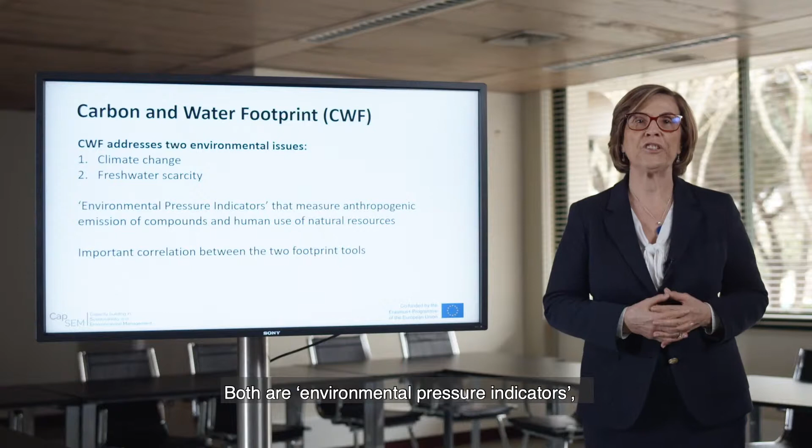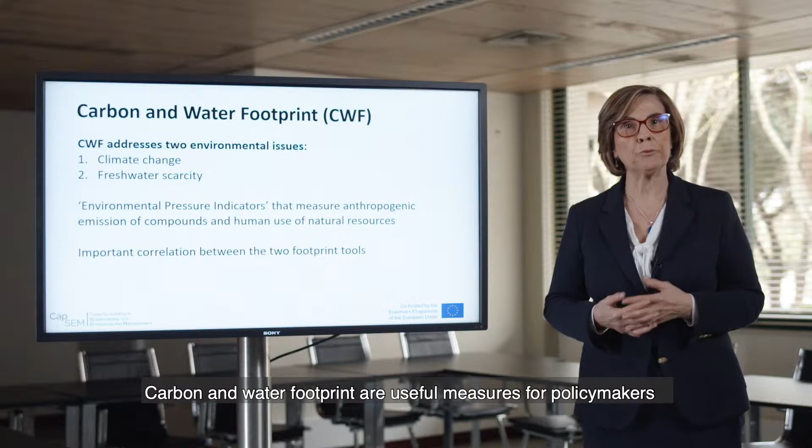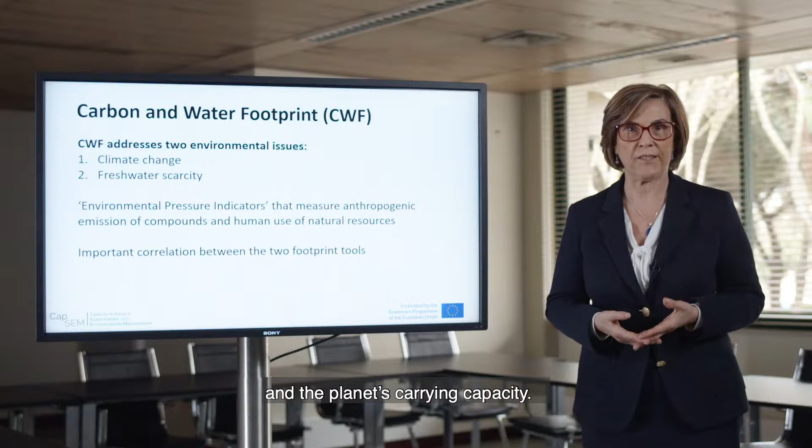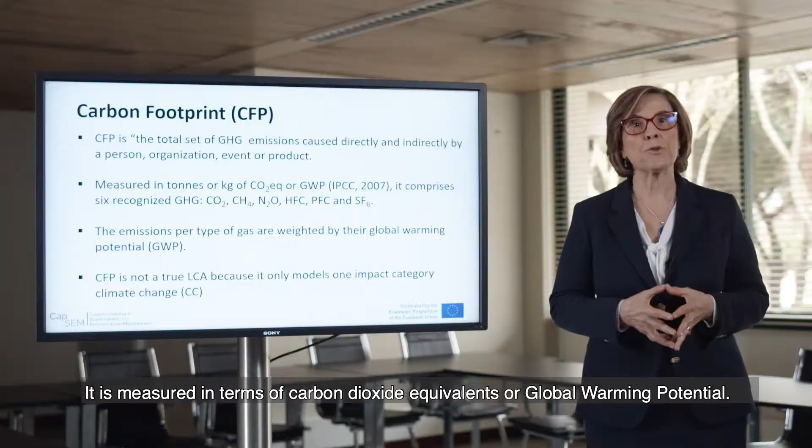Now we turn to the concept of carbon and water footprint. Both are environmental pressure indicators, measuring people's use of natural resources and the anthropogenic emission of compounds into the environment. Carbon and water footprint are useful measures for policymakers working to address overexploitation of natural resources and the planet's carrying capacity. Carbon footprint is the total set of greenhouse gas emissions caused directly and indirectly by a person, organization, event, or product. It is measured in terms of carbon dioxide equivalents, or global warming potential.

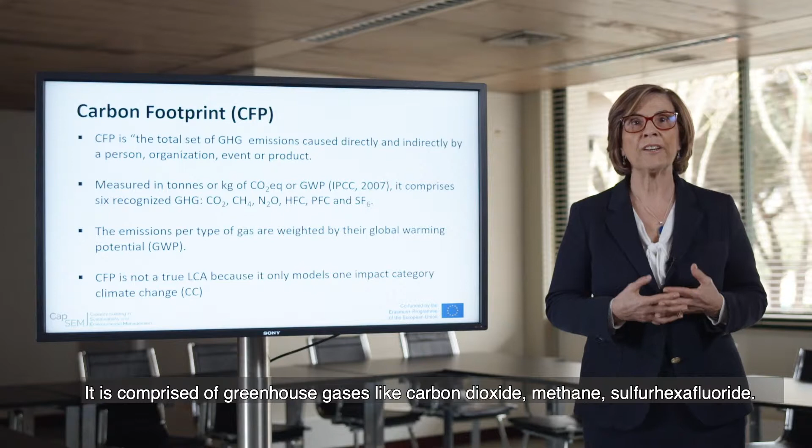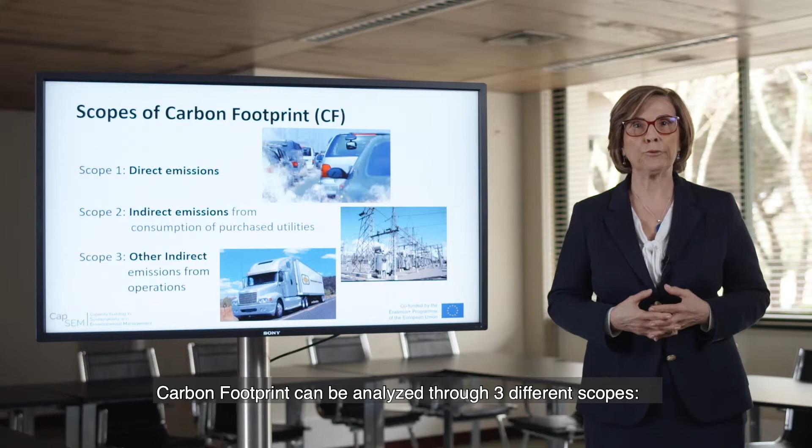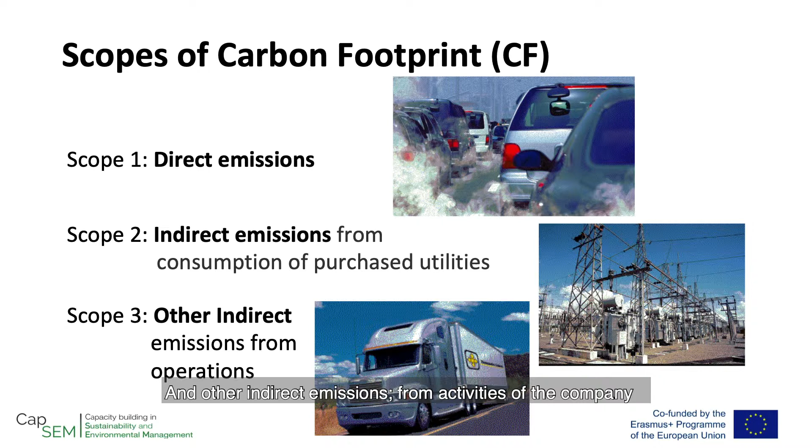It is comprised of greenhouse gases like carbon dioxide, methane, and sulfur hexafluoride. Carbon footprint is not a true LCA because it only models one impact category, climate change. Carbon footprint can be analyzed through three different scopes: direct emissions, which includes combustion sources; indirect emissions, which includes consumption of purchased utilities; and other indirect emissions from activities of the company, such as transportation of waste.

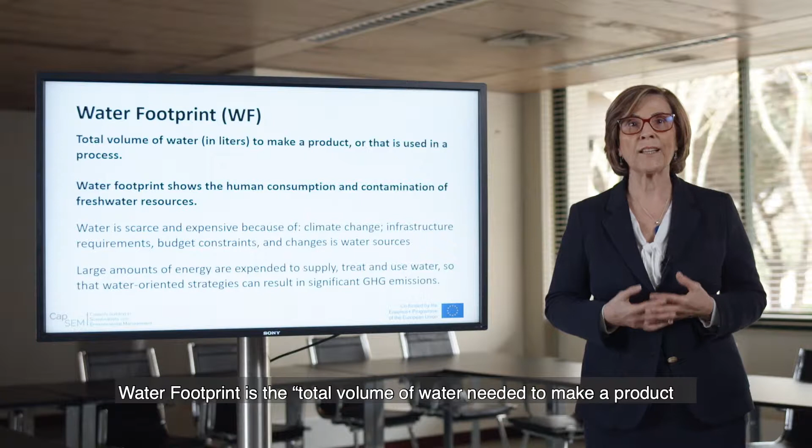Water footprint is the total volume of water needed to make a product or to be consumed in a process. Water is becoming more scarce and expensive. Climate change and other stresses are limiting the availability of clean water and affordable energy. Water footprint shows human consumption and contamination of freshwater resources.

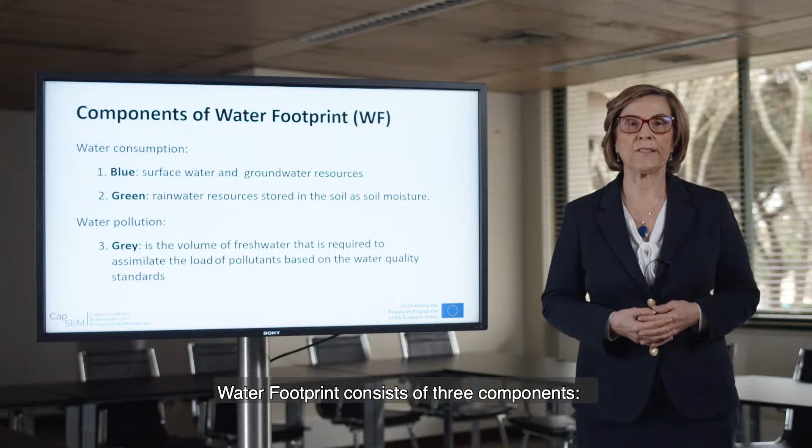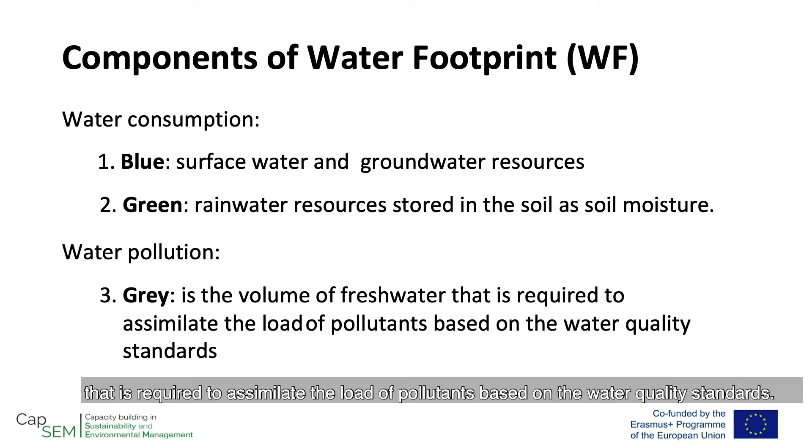Water footprint consists of three components. The first two are blue and green, which relate to the consumption of water resources. The third is grey, which is the volume of fresh water required to assimilate the load of pollutants based on water quality standards.

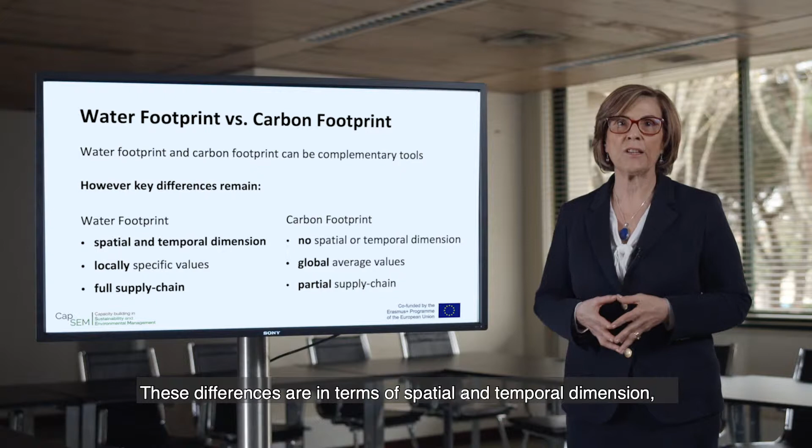Water and carbon footprint can be complementary tools. However, some key differences remain, in terms of spatial and temporal dimension, specific or average values, supply chain, and so on.

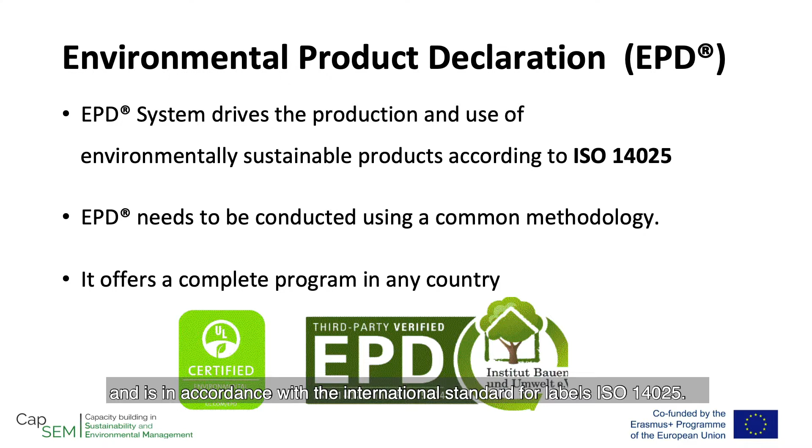Environmental Product Declaration (EPD) is an independently documented report containing environmental data of products or systems based on LCA. EPD is organized using a common methodology and is in accordance with the International Standard for Labels, ISO 14025. LCA is a method and EPD is a report.

For each product group, rules are developed called Product Category Rules, PCR. These control the calculations and data collection requirements between product categories. It enables the creation of an EPD. PCR is included in ISO.

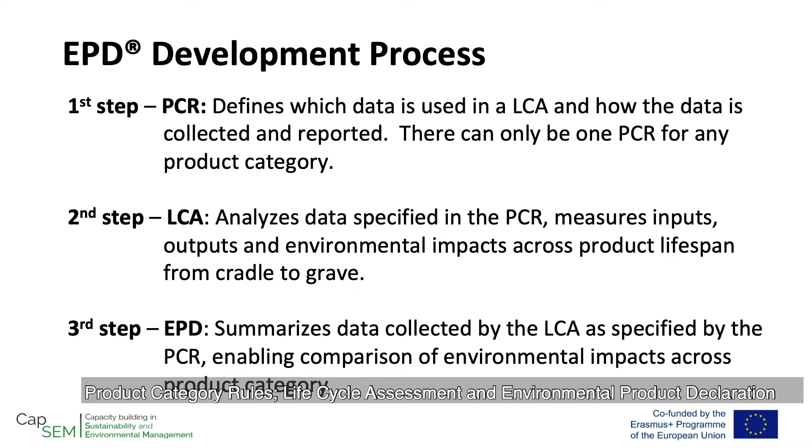14025. The process for implementing an EPD is made up of three steps: product category rules, life cycle assessment, and the environmental product declaration.

EPD may be used for many different applications, such as green public procurement, eco-design, or environmental management systems, such as business-to-business communication.

70% of a product's environmental impacts result from the design stage. To reduce these early negative impacts, we can think in terms of life cycle engineering, meaning the engineering and design of products and processes to minimize the cost and the environmental impact for all life cycle phases of a product.

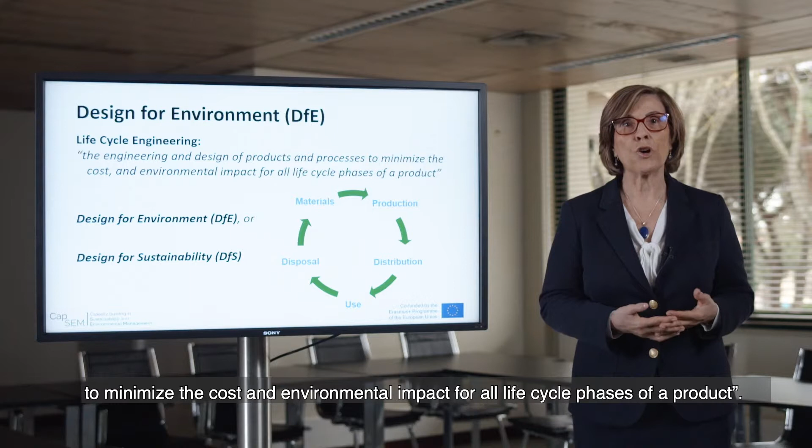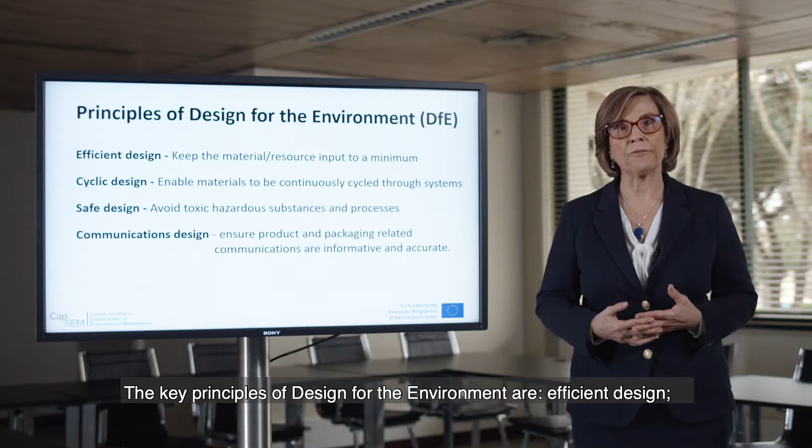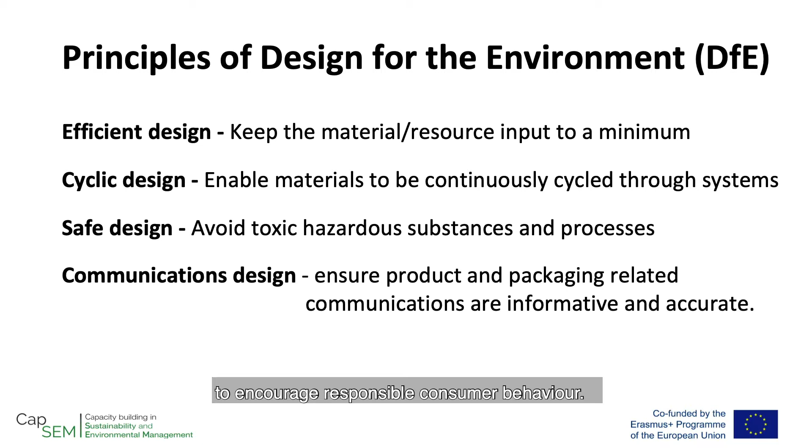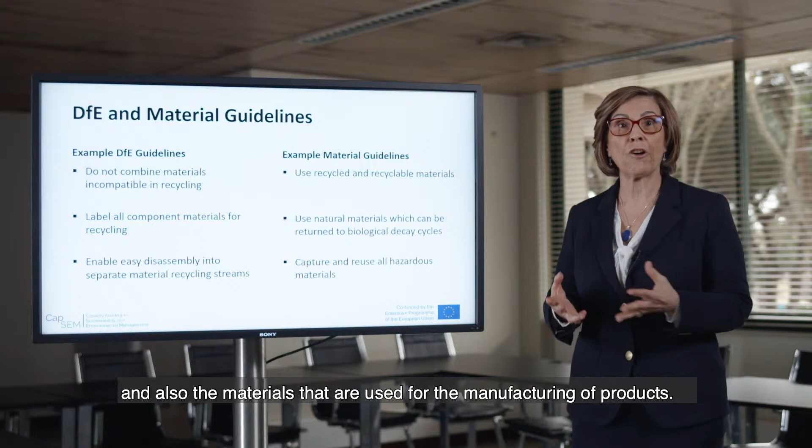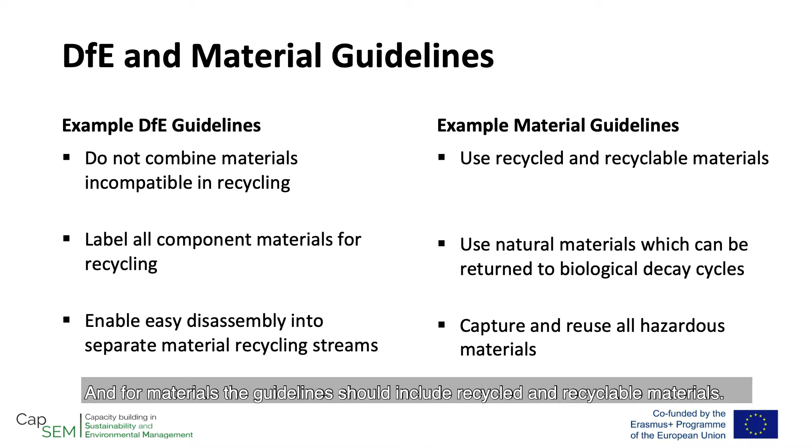We see that with good design for the environment, we should not combine materials which are incompatible for recycling. And for materials, the guidelines should include recycled and recyclable materials.

Design for the environment provides substantial benefits for manufacturers, like reducing production costs, identifying new business opportunities, and so on. We now turn to look at a case example that illustrates some of these concepts.

Secil wants to be a very sustainable cement producer company. So we have to regard very carefully with carbon and with water and also other KPIs.

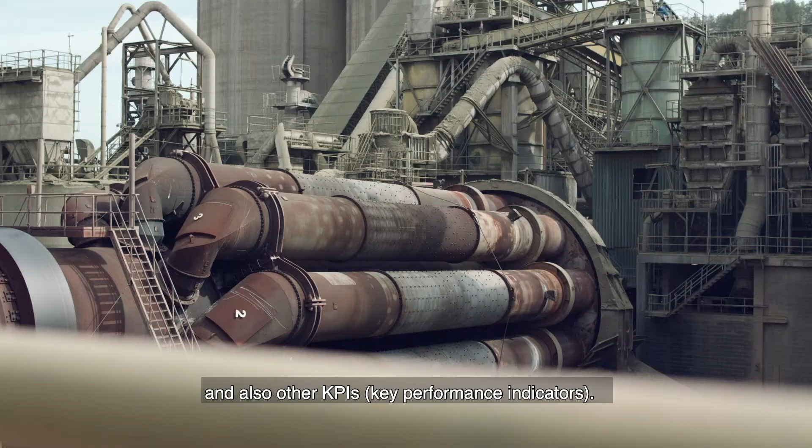We are within the European Trading Scheme. Besides that, Secil is a member of CSI, the Cement Sustainability Initiative, and now also the Global Cement and Concrete Association. So we have international commitments, we have international goals we have to fulfill.

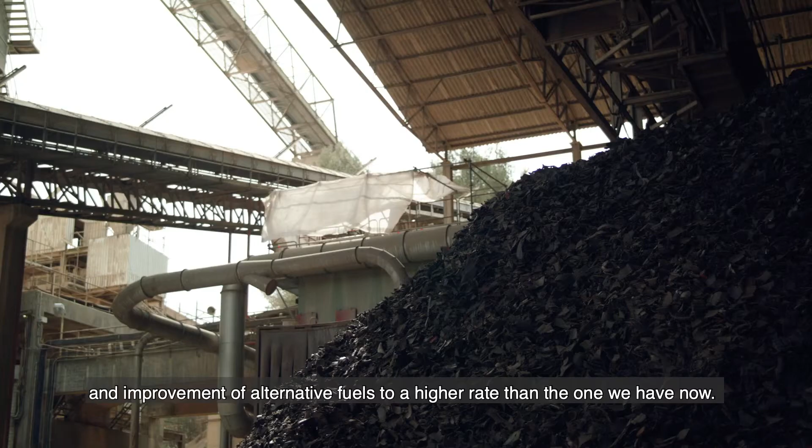And they are the reduction of water, the reduction of CO2 emissions, and the improvement of alternative fuels to a higher rate than the one we have now. We have here in this plant about 55% consumption of alternative fuels, and we want to reach 70% by 2020.

Concerning water, we want to reduce our consumption of water and manage the entire life cycle of water.

In the last years, we can notice an important improvement in the environmental performance of the plant. We introduced alternative fuels in 2004, and that was a major change in environmental management of the plants, and we have a very good system of filters, so we have a very low level of dust emissions.

And we carefully take care of the biodiversity in our quarry, which is in a national park, so we have to be very careful with nature and with the environment.

A sustainable future is possible, and design for the environment is a key strategy to help manufacturers achieve it. That concludes our look at Level 2 of the CapSEM model. In the next video in this series, we learn about Level 3, Organizational Change for Improvement.